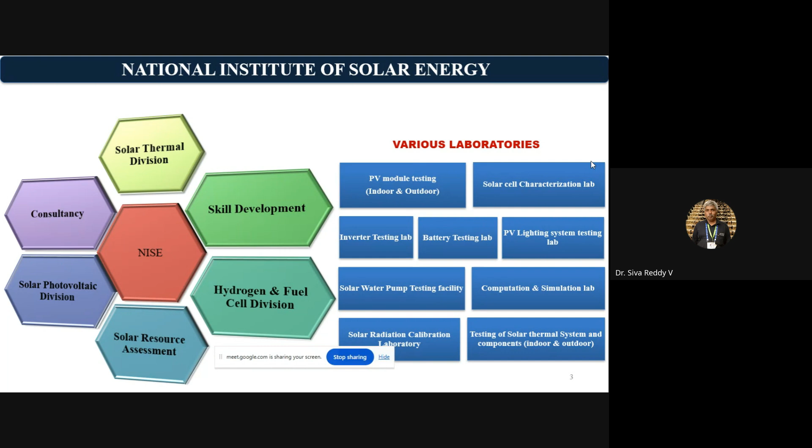Coming to today's topic, I think the last 4 days discussed hydrogen. Then why are we moving to hydrogen? Hydrogen and green hydrogen. The target is to move to green hydrogen, not just hydrogen. We know we are the third largest emitter of CO2. The major contribution is electricity, whatever electrical energy we consume in day-to-day life, and next is the industry sector. The estimated CO2 as of 2020 is 2.6 gigatons per annum. Already we have a net zero target and all.

So why do we want to move to hydrogen? Our pollution. One is electrical, second is industry. In the electrical sector, the total installed capacity is 441 gigawatts. In that, renewable energy reached 43%, but total demand utilization has not crossed 20%. We all know renewable energy is intermittent. We can't predict it; it is not continuous. So even though renewable installation capacity reached 43%, we still depend on the fossil fuel sector. 243 gigawatts is supporting the entire grid stability.

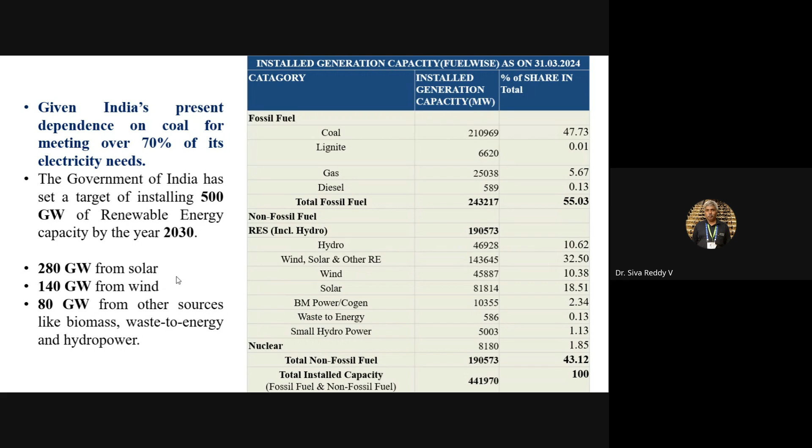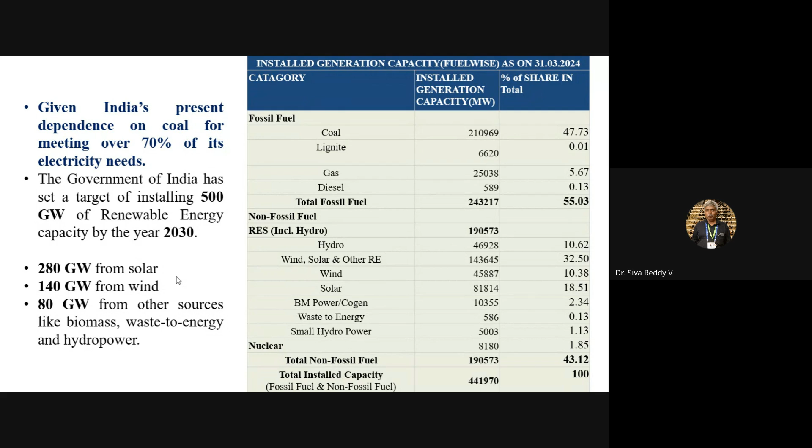Whatever the electrical energy we are generating by the renewable energy, intermittent nature renewable energy, we can store, we can produce hydrogen. Then hydrogen can be stored wherever seasonal utilization or grid stability is required, there we can utilize. So hydrogen is one of the solutions for storing energy. This is one of the targets for the electrical energy.

Next, industrial sector. Everywhere in the industrial sector, fossil fuels we are using. But some of the targeted sectors, especially the fertilizer sector, urea fertilizer manufacturing, they're almost importing 5 million metric tons of ammonia. For urea, 10 million metric tons we are importing, and 3 million metric tons. Total, our annual import value is reaching 6 billion.

If we are capable to produce green hydrogen, we can reduce the CO2 emissions. Our net zero target we want to reach by 2070. In these two sectors, we have to reduce the utilization of fossil fuels. So the best utilization is hydrogen in the fertilizer sector. Next, oil refineries and steel processing industry. Majorly, we are using hydrogen there.

So in these two sectors, in one sector we are introducing hydrogen for storing electrical energy. In the second sector, they are already using hydrogen for production of ammonia for different purposes. There we are capable to substitute the gray hydrogen or blue hydrogen with green hydrogen. We can reduce the CO2 emissions. So demand is fixed, enough demand.

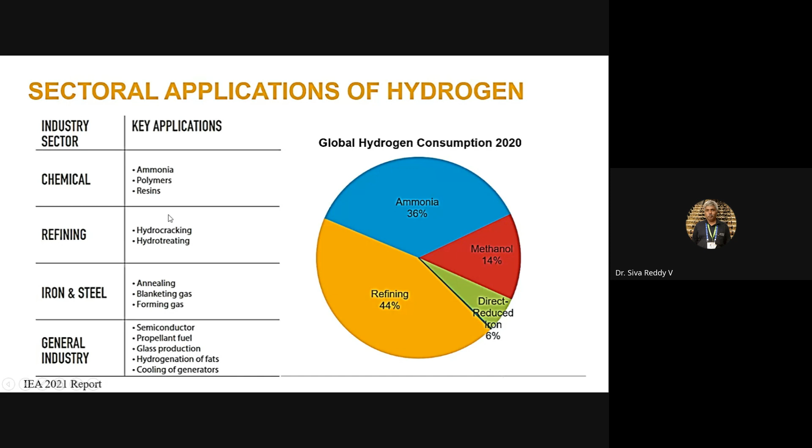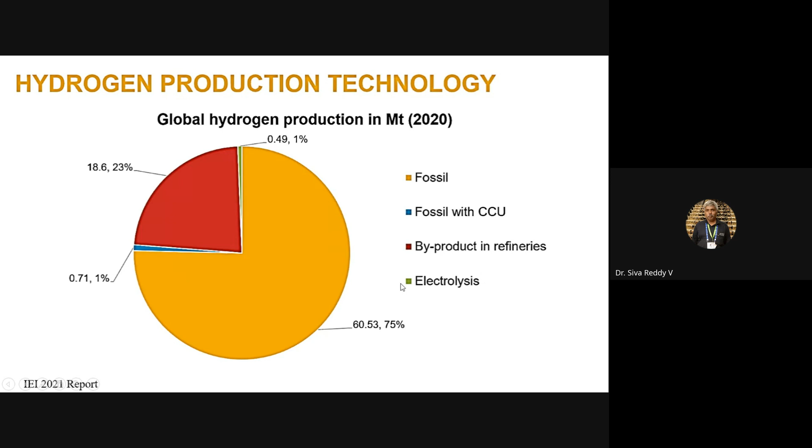Then coming to the renewable energy inputs, only two sectors of renewable energy are fulfilling our needs. One is wind energy. Earlier, at 100-meter height, I think the target was around 400 gigawatt only. Now, the potential estimated by the National Institute of Wind Energy, with height increased to 120 meters, what is the maximum potential capacity? And with height increased to 150 meters, what is the potential capacity? So wind also has high support for electrical energy generation.

Second one, solar. If 3 to 5% of the solar energy you are capable to utilize, it will be sufficient to fulfill our entire needs. And with PV panel technology upgradation, when we started in renewable energy in 2007, I think at that time the PV module cell structure could convert visible radiation only. Now that range also increased up to 1000. That's why cell efficiency is increased.

So absorption rate is increased, automatically output also increased. Earlier, the laboratory efficiency was only 15%. Now it has crossed 23 to 24%. Field efficiency also, majorly we will get 18 to 20%. So these are the renewable energy technologies available, two technologies to substitute the electrical and industrial needs.

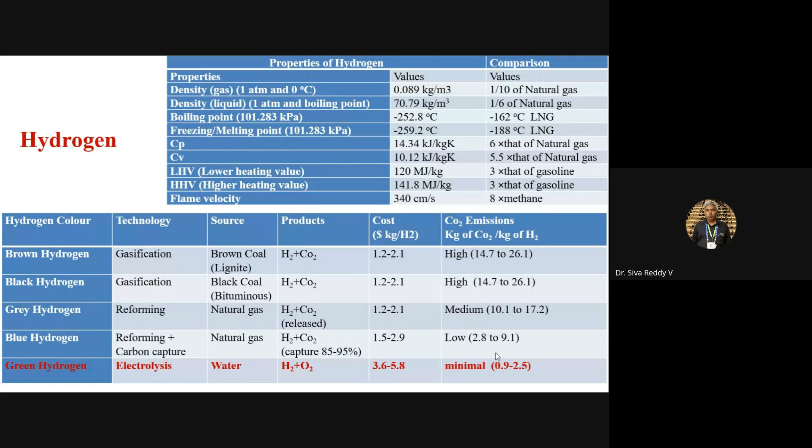For manufacturing the product, we are not using renewable energy. So that's why with green hydrogen also some CO2 emissions will be there. It can reduce based on the different technology. Now technology upgradation is there, the value is reduced, but the CO2 emissions are not zero with green hydrogen either. These are the technical aspects, mostly discussed for our economic analysis purpose. Just some of the points I am touching.

One is cell pressure. First, the alkaline electrolyzer is the most matured electrolyzer system, but the main problem is it is not suitable for renewable energy. Why? Because renewable energy is intermittent in nature. The response time of the alkaline electrolyzer will take time, 1 hour, 2 hours, based upon the heater arrangement and pressure enhancement arrangements.

It will change. But for continuous operation, if you are continuously getting grid power, then the cheapest and well-matured technology is the alkaline electrolyzer, which they are using for industrial applications. The gas pressure is lower, only 1 to 10 bar, the maturity is full, and the lifetime of the electrolyzer stacks is also high compared to others.

Second one, anion exchange membrane. It is not fully matured, R&D stage only. Next, proton exchange membrane. This is also a somewhat mature technology. The main advantage is it is well suited for the intermittent nature. Means the response time is very, very low compared to the alkaline electrolyzer. And hydrogen purity: if response time is very low, the purity is also high.

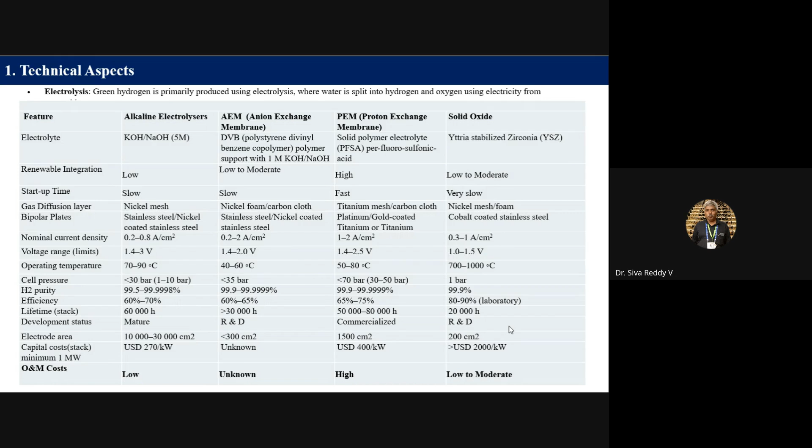So two technologies, especially for our renewables, alkaline electrolyzer and proton exchange membrane, are only adopted at present. Solid oxide is generally considered for industrial waste heat. So these are the energy input requirements for each technology. The alkaline electrolyzer uses roughly 4.5 to 5.5 kilowatt hours of electrical energy for 1 meter cube of hydrogen production. Operating conditions I already mentioned.

Next one, storage technologies. At present, compressed hydrogen gas is one of the mature technologies. In our institute, I will show the photographs, there is also a filling station. We are generating the hydrogen, compressing up to 700 bar and storing at 700 bar. And filling stations are there. The discharge pressure is 150 to 200 bar. We are discharging the hydrogen.

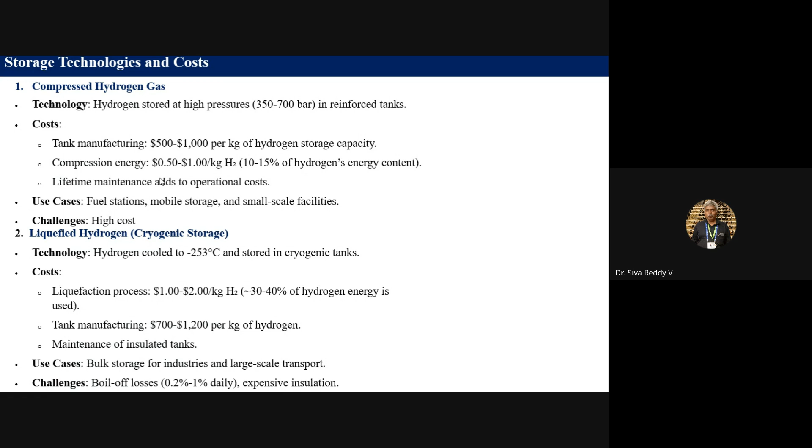The compression energy cost, the majority of the costs I mentioned in dollars. Why? Because they are still not converted to Indian rupees. Why? Because mass production rates are not coming into the picture. That's why I kept it in dollars only. The compression energy is $0.5 to $1 per kg of hydrogen.

Next, the second technology, liquid hydrogen. Mainly cryogenic storage. This is a highly challenging one. One is reaching minus 250 degrees storage temperature. That is the first challenge. The second challenge is to maintain the tank temperature. So proper insulation is required. Otherwise, it will convert to gas again. Gas means it will change the volume again. It will create big issues. So manufacturing of the tank and the insulation system is the main problem.

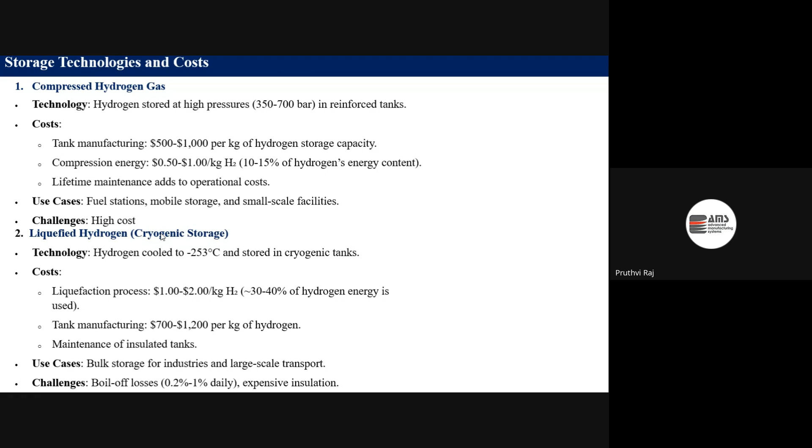And one more challenge, boil-off losses. Because next, hydrogen we are storing, for what purpose are we storing? Next we will generate the electrical energy. Then once we want to generate electrical energy by using any method, at least 70 to 80 degrees of temperature is required. Again, that boil-off loss also comes into the picture for liquid hydrogen storage.

Next, metal hydrides. This is one of the R&D subjects indirectly, because lower capacity we want to store. Different metal hydrides are there, but I think the Department of Energy, US government, kept the benchmark. Any metal hydride or battery technology per meter cube or per kg of the volume of the metal should be capable of storing at least 2.5 units of energy. That is one of the benchmark targets.

So different metal hydrides are discussed. The main issue is heavy weight, and charging and discharging also is not at a faster rate. Releasing will take time, but for releasing the hydrogen you also have to spend some energy, meaning some heating is required. And metal hydrides are not fully matured for industrial application.

Whatever the application, in my mind it is only electrical energy generation. The second one is industrial hydrogen substitution. For these two purposes, metal hydrides are not a fully supporting technology, but at lower capacities where decentralized storage is required, metal hydrides are one of the promising storage methodologies. The cost is also $15 to $20 per kg of storage.

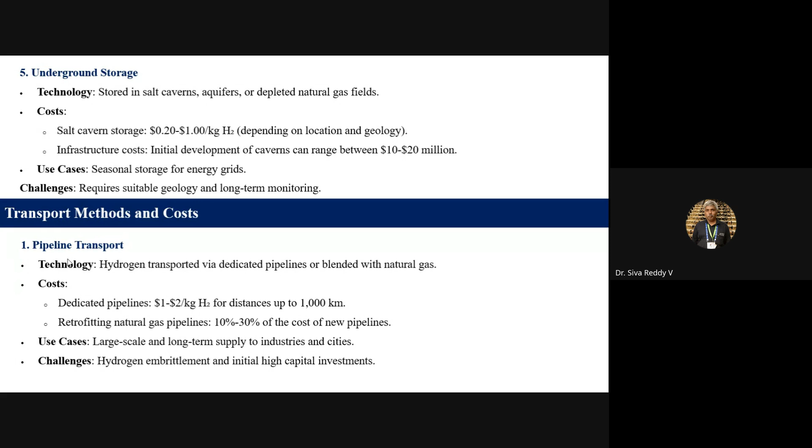Retrofitting of the natural gas pipelines will take 10 to 30% of the cost of a new pipeline, because hydrogen density is very, very low compared to natural gas. For large scale, long term supply to industries and cities, it is the best option. Compressed gas, I already mentioned, filling stations we have. At filling stations, generally they are compressing the hydrogen, storing it in tanks and discharging it. This is one of the regular storage systems.

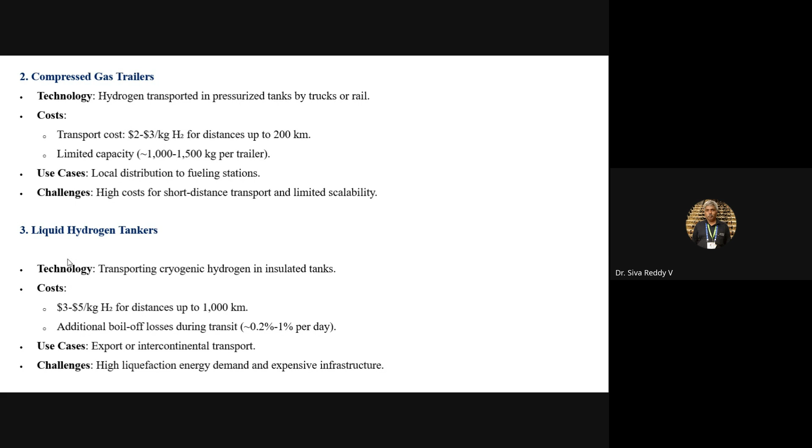Liquid hydrogen tankers, but I already mentioned liquid hydrogen. The main problem is that boil-off losses are high, but it is one of the best methods. But this is not a cost effective method. High cost, $3 to $5 per kg. But for exports, it is good.

Next, like ammonia transportation. At present, the best suitable one is hydrogen blending in the natural gas pipeline. At present, only that is running. So now, whatever pilot projects the Indian government is giving, I will show the Indian government policies also, they are concentrated on areas where the system is already available. So we can reduce the investment cost for the transportation system.

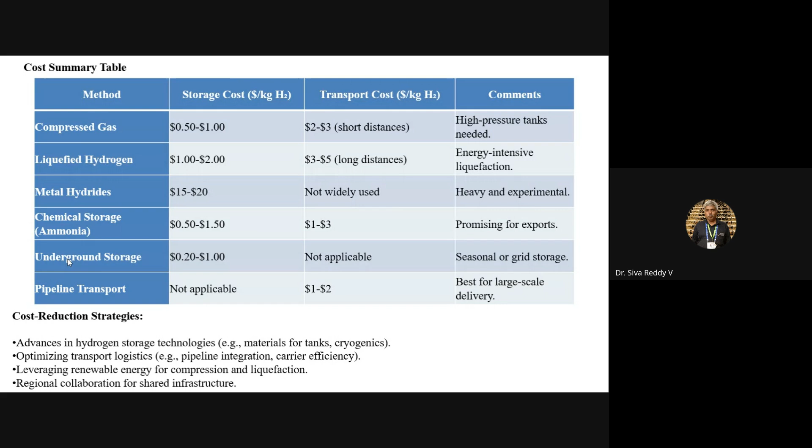First, cost reduction strategies, because the R&D part is coming into the picture. Main storage technologies, material tanks, type 3 and type 4 material tanks, the cost we have to reduce. Next, optimize the transportation logistics, pipeline integration, leverage renewable energy for compression and liquefaction, and regional collaboration for sharing of the infrastructure. That is the main important one. Only then are you capable of utilizing already existing systems. We can reduce the entire total production cost of the hydrogen.

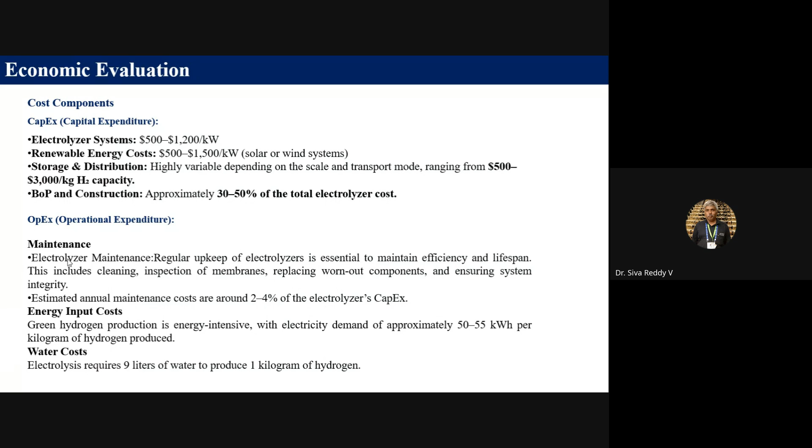Next, water cost. Electrolyzers require high purity water. Producing 1 kilogram of hydrogen requires approximately 9 to 10 liters of water. So the contributions to the overall hydrogen cost are the energy input, maintenance cost and water cost.

Current cost for green hydrogen: why? Because in-house electrolyzer manufacturing has only now been initiated, so stacks are imported, the materials are also costly, and the imported quantity is low, the quantum has not increased. In this condition, at present the green hydrogen production cost is estimated at $3 to $8 per kilogram.

But one of the best achievements: in 2007, the unit cost of electrical energy from PV panels was 14 to 16 rupees. At present, without any subsidies, Adani and different companies, I am not naming only Adani because there are so many, including transport and interstate transportation, the unit cost at present is 2 rupees 49 paise. Wind energy is also like that, 2 rupees 1 paise. If they are producing and supplying inside the state, the cost is only 1.9, less than 2 rupees. So the renewable energy cost has drastically reduced from 2007 to 2024.

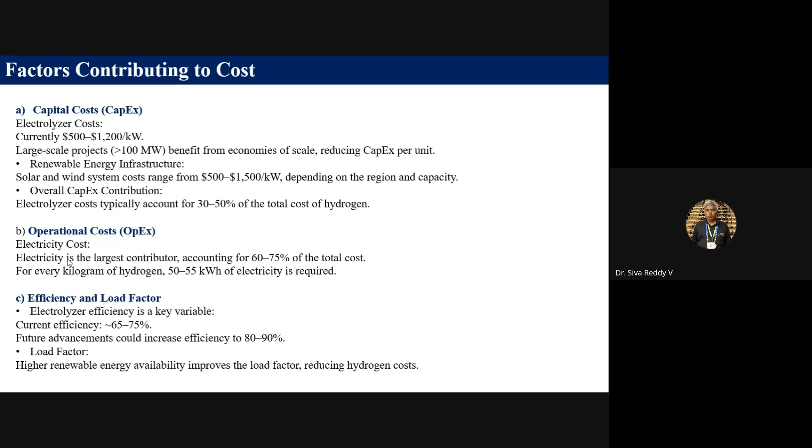So these 3 points the Indian government concentrated on: one is efficiency enhancement of the system, second is reduction of the production cost of the electrolyzer, and third is integration of renewable energy and low cost storage integration. These three are the major factors contributing to the reduction of hydrogen cost. So based on these three parameters, the Indian government launched the National Green Hydrogen Mission.

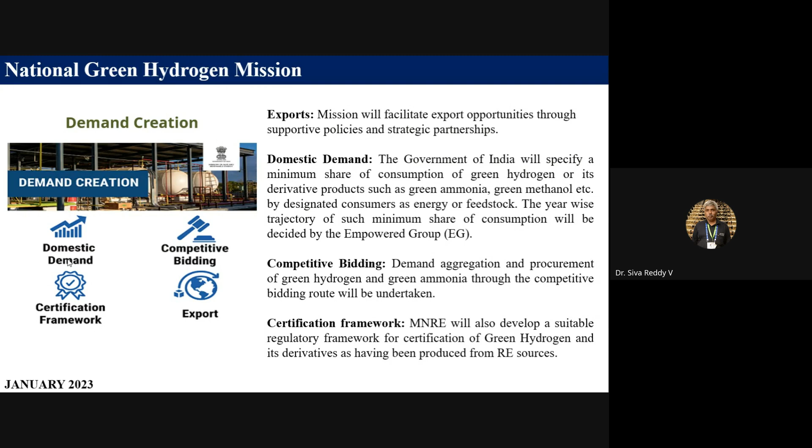These are the four targets: exports, domestic demand creation, because these are not demonstrated projects. You can see our website also, the MNRE website. These are not demonstrated but commercially viable projects we want to initiate. And we started a certification framework - NISE is the only body, the certification framework body for this green hydrogen mission.

So one of the policies is strategic interventions for the green hydrogen transition. This is the first strategy. In that, two methods we are concentrating on: supporting domestic manufacturing of the electrolyzers - this is our first strategic incentive. Second, incentives we are offering for production of green hydrogen.

For the production of green hydrogen, Tamil Nadu government came forward, UP government, Maharashtra government and AP government - a total of 7 to 8 governments came forward. We will produce green hydrogen especially for utilization in the fertilizer industry. Wherever states have fertilizer manufacturing capacities, there we will substitute ammonia imports. We can reduce ammonia imports by production of green hydrogen. So the two incentive schemes launched are for domestic manufacturing of electrolyzers and production of green hydrogen.

Pilot projects I already mentioned are properly concentrated where the storage and transportation facility, the pipeline - natural gas pipeline facility already available - their retrofitting is 10 to 30% of cost. With retrofit we can transport the hydrogen. And storage, the cave storage facility, we can easily acquire. And the renewable energy production capacity also.

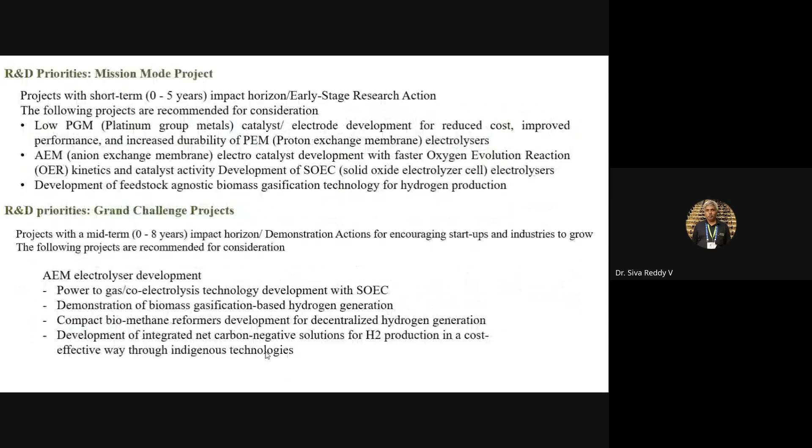Any investor for a social service will not invest, so their expected internal rate of return is at least 10%. Because simply keeping money in fixed deposits, we get 6 to 8%. More than that they must get, then only will they come into this business, at least 10% rate of returns.

The overall lifetime 10% return, these are the estimated figures.

We are expecting, like solar PV panels, that electrolyzer cost also will reduce. We are replacing the materials we currently use. And for the separator also, recently in Bangalore one industry started using water as a separator. The efficiency is low, but the cost of the electrolyzer is reducing automatically. That's one of the methods they are using.

I'm not concentrating on the technology point of view, technology has already been discussed. The economics is where it will fit, the total economics part: efficiency, mass production, renewable energy input, then only paybacks are coming.

Otherwise, at present the Indian government is giving some incentives. In the strategic plan of action, initially up to 2029-30, we are giving some incentives to balance that cost. For whatever cost is coming beyond $3, that cost is substituted by the Indian government to encourage the industry. But in the meanwhile, the cost itself has to reduce, like PV manufacturing.

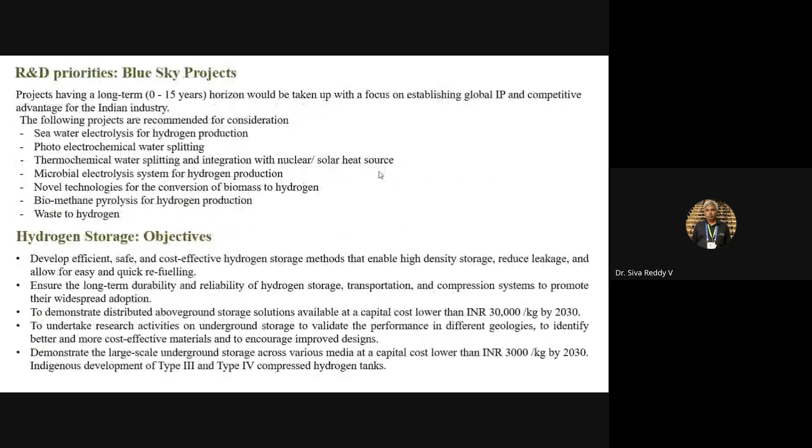I think these are the systems. So here in our institute, on our institute plant working, I will explain.

This is not a commercial plant. In India, the first plant for demonstration purposes, green hydrogen demonstration, was established in 2012. One more plant, a proton exchange membrane electrolyzer based plant, is at IOCL in Delhi. Only two plants are there, so this plant is the first plant.

Here in our institute, more than 200 acres of land is there, so we have almost 700 kilowatt capacity renewable energy installations available. So full green energy we are supplying, but the plant running time is not 24/7.

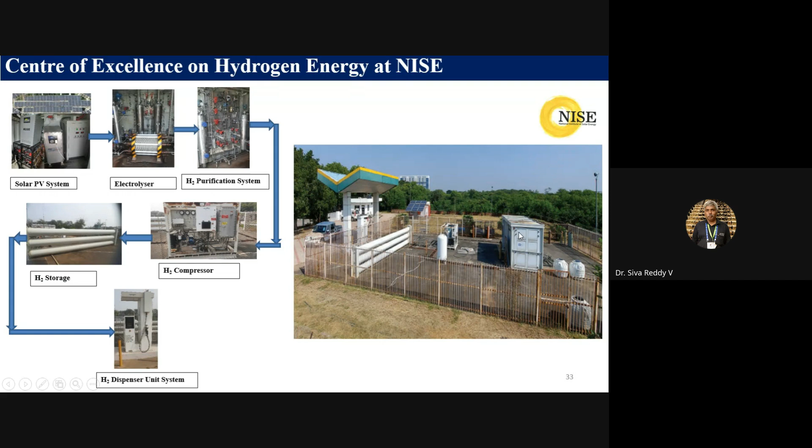This is the electrolyzer, this is the purification system, purification and control unit. This is the compressor unit, this is the storage unit, this is the filling station. Some of you may visit also and see. Now we increased from 5 meter cube to 15 meter cube.

I will stop my presentation. We can start discussion, it is good.

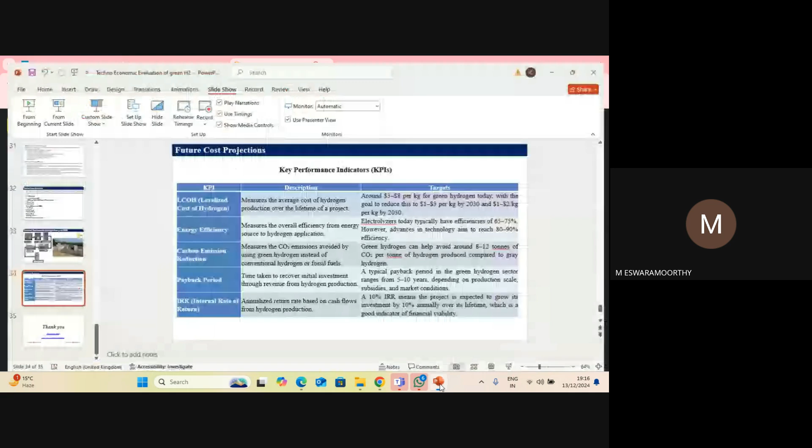Dr. Trijo, so you are asking some questions. Yeah, please, hello sir. Can you mention the startup opportunities available with green hydrogen? Could you introduce yourself, where are you from? Switch on your camera, that will be visible to other participants also. I'm sorry sir, my camera is not working. No issues, no issues, what do you want sir? I'm from Sri Buddha College of Engineering, Kerala.

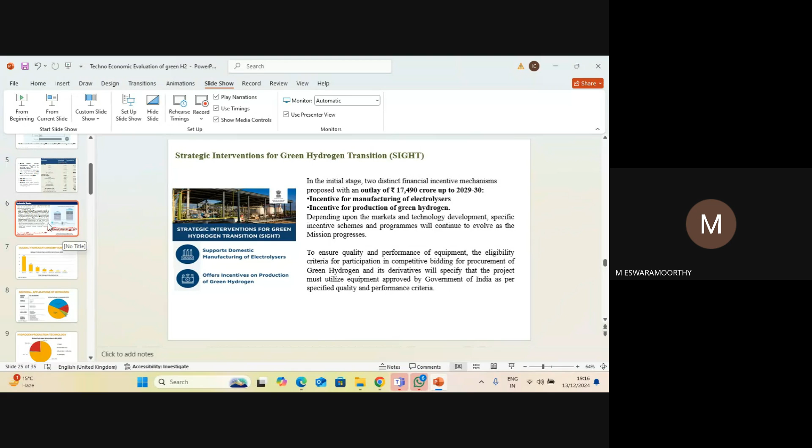Sir, can you mention the startup opportunities available with green hydrogen? Sir, your voice is not clear. He is asking the startup opportunities in the green hydrogen domain. Yes sir, that...

Electrolyzer manufacturing, or rest of the components also. Rest of the plant also. The integration of the system, that is also one of the important components. Exactly, especially for mechanical background persons. At least I think new proposals, they are inviting proposals. Rest of the plant, whatever components are there, their manufacturing also, especially compressors, 700 bar pressure we want to compress the hydrogen for the filling station purpose.

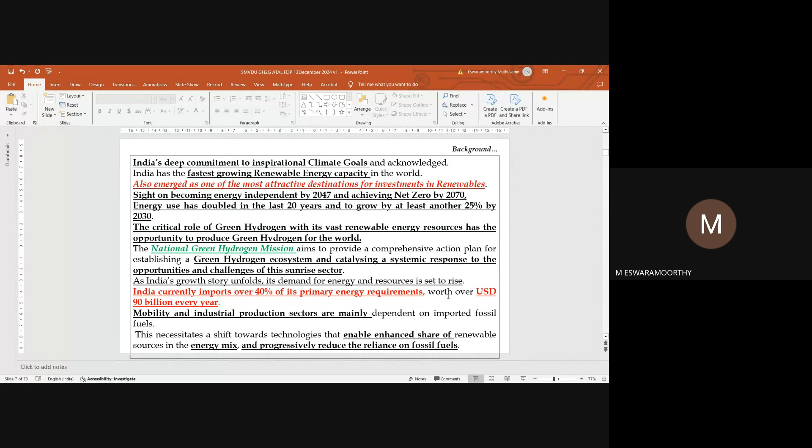So there is a necessary shift towards technologies which enable an enhanced share of renewable sources in the energy mix, mixing with fossil fuel to reduce its consumption rate and reliance on fossil fuel, with the aim of reducing emissions as well. Now in these slides, I will first start with solar photovoltaics.

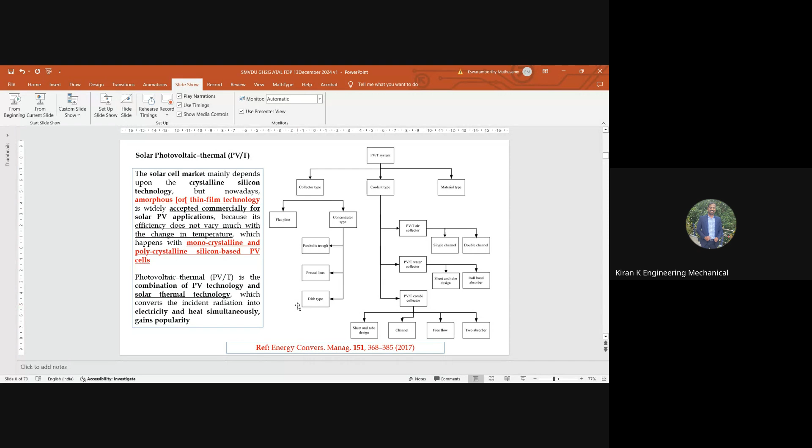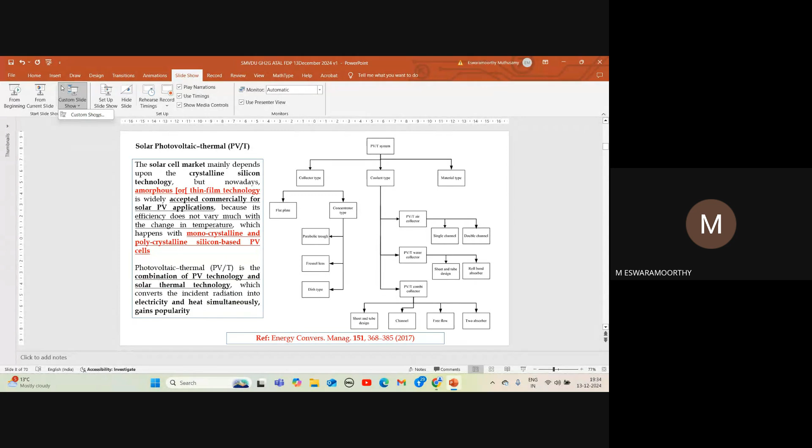Sir, can you please go to slideshow, because the screen is very small; it is not in presentation mode. I understand, but when I go to presentation mode, it is not visible. There is some technical glitch. Top tools: home, insert, draw, design, transition, then slideshow, from current slide. Is it visible now? No, sir. When you're sharing, share the entire screen; you have shared only the window. Okay, thanks for your input. I'm sharing the entire screen again. Slideshow from current slide. Is it okay?

Is it visible, sir? Yes, sir. Visible. Okay, sir. Fine. Thank you, dear participants, for your technical input on this.

Yeah, thank you. So now I'd like to carry on with the presentation. I said there are various different kinds of electrolysis available for hydrogen generation, but the input is supposed to be green electricity, taken from the solar thermal route or solar photovoltaic route. These routes have low efficiency, but if you enhance the efficiency using thermoelectrics and PCM material, it will help increase the overall energy conversion efficiency. It helps reduce the total cost of green hydrogen production.

So now I'd like to give some state-of-the-art technologies available in the literature, where in the solar photovoltaic thermal PVT system, the thing is to increase its efficiency. Many researchers work in solar thermal, you might understand it.

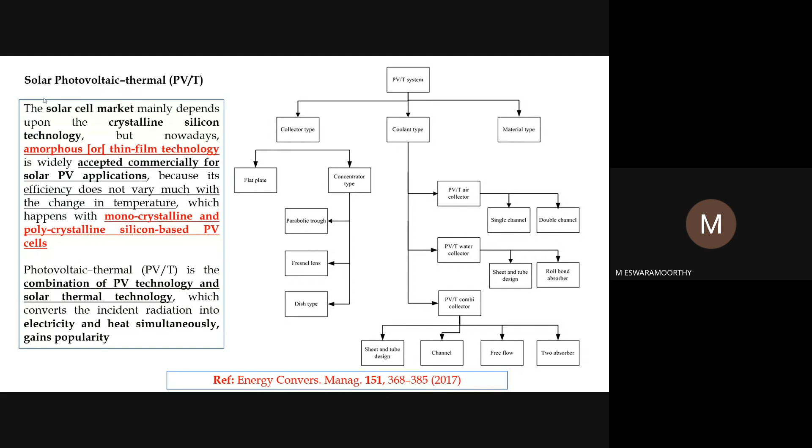So this collector, in thin film technology or amorphous technologies in the solar cell market, uses coolant materials, an air collector or water collector, or a combination of nanofluid, which helps enhance its thermal efficiency. That's an overview, and they mentioned the system generates both electricity and heat simultaneously. That is an additional advantage of the system.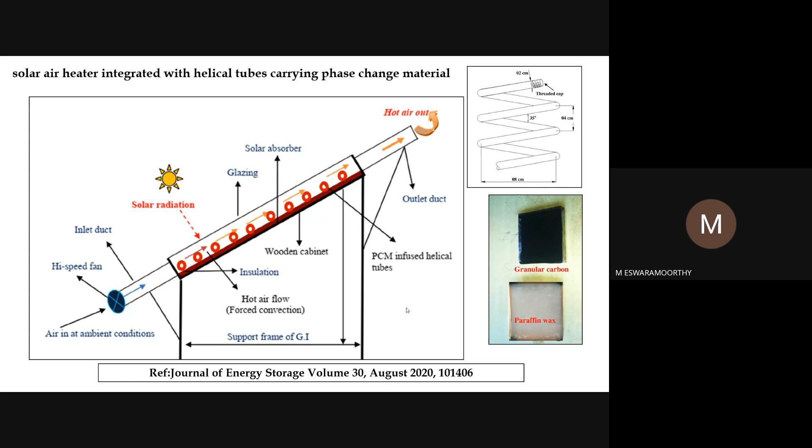So this solar still, which is using phase change material and nanoparticles, I'd like to skip over here. It's not relevant to us. Whereas this solar air heater integrated with helical tubes carrying phase change material, the only thing is heat storage, which is using paraffin wax, which helps to enhance its performance. So they are used in different applications.

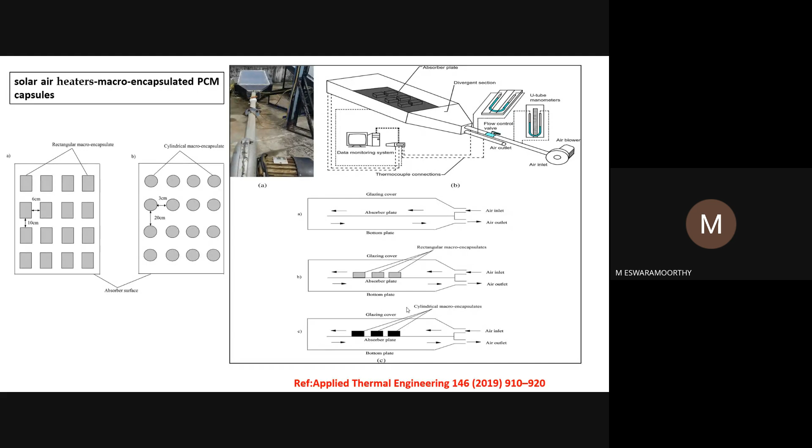So another, it's an air heater. Let me skip it over here. That air heater with macro-encapsulated PCM capsules. I think this work is a very old one. It's done in NIT Calicut, Professor Jairaj and team. Then the pin solar air heater using latent thermal energy storage.

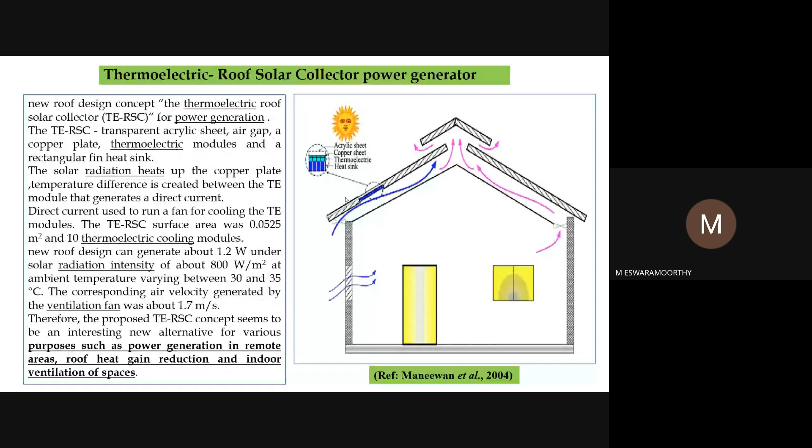The work here is used to generate additional electricity to run the fan. So in this research work, people are working on the thermoelectric generator in power generation mode to run small applications, like running your fan or charging your battery. These kinds of things are happening in this study.

Based upon the PV cell material, the optimum operating temperature is going to vary. We have to maintain it based upon that operating temperature. PCMs have different melting temperatures, and that particular melting temperature PCM is what we are supposed to use here. So it will help to maintain the PV cell at constant temperature and at the maximum power generation point.

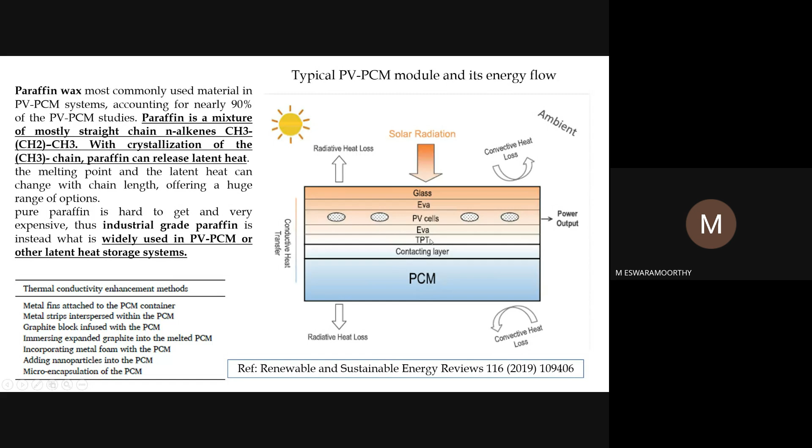So this is the overall picture of how the structure of this component is, where the glass is connected with some gap and the PV cells. Then the Tedlar coating, TPT, the contact layer, where the PCM is going to be fixed. Then the photovoltaic panel is integrated with the PCM material.

Even in the efficiency of any thermal system, if it improves 0.1%, it's a great achievement. It means without any extra heat input, we are gaining power output. So 0.1% is an improvement.

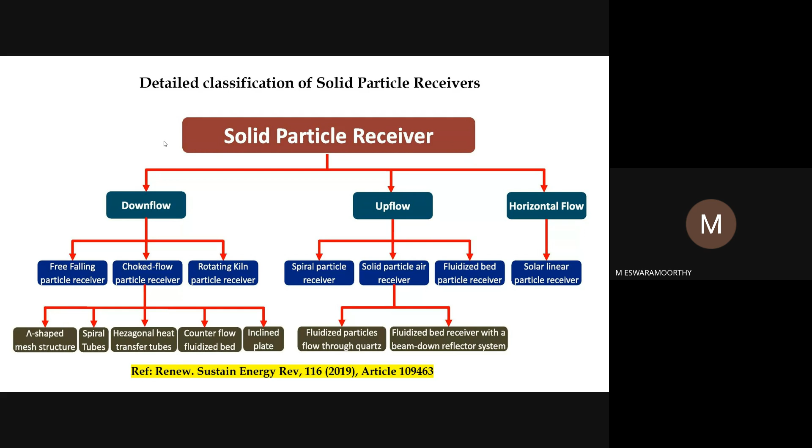Solid particle receivers come in different mechanical arrangements. It was reported very recently: downflow, upflow, horizontal flow, fluidized particle flow through quartz, fluidized bed receivers, inclined plate counterflow, and triangular-shaped mesh structures, different mechanical geometries. Then supercritical carbon dioxide SCO2 Brayton cycles in power generation technologies.

Supercritical CO2 is used as a thermal transport fluid. Again, no need to discuss; it is a thermodynamic process, the Brayton cycle. So let me go to the challenges: material problems due to high temperature and high pressure, limited efficiency due to the metallic materials and the structure, small specific work compared to Organic Rankine cycles, and large system volume.

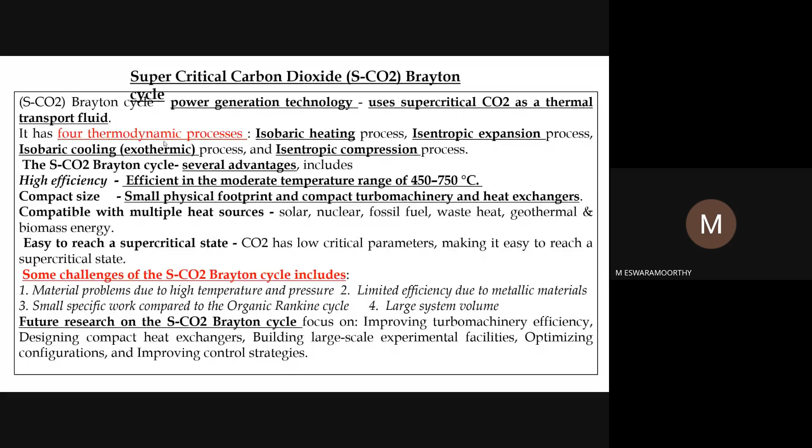Future research on this topic is focused on improving turbomachinery efficiencies, designing compact heat exchangers, building large-scale experimental facilities, optimizing configurations and improving control strategies. These are some areas in which the supercritical CO2 Brayton cycle is going to be improved.

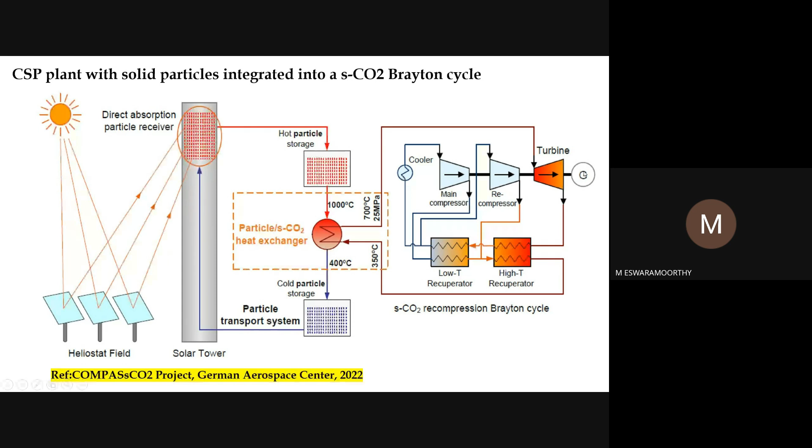It's better for existing solar systems: a CSP plant with a closed-loop SCO2 Brayton power cycle is also reported here. This technology uses the SCO2 Brayton cycle with a heat storage unit, turbine, recompressor, main compressor, heat exchangers and high-temperature and low-temperature recuperators, used to recycle and exchange heat. So it also gives better efficiencies.

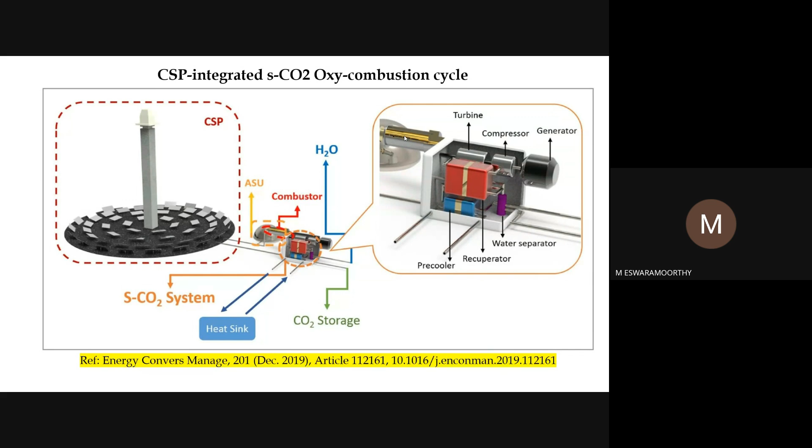Then the CSP-integrated SCO2 oxy-combustion cycle, reported in 2019, where the concentrated solar power plant is combined with a conversion unit: the turbine, compressor and generator are compact in nature, with CO2 storage and the supercritical carbon dioxide system, where the heat sink can be stored.

Another is the future technical target for next-generation receiver components. The ultimate aim of whatever we are discussing on supercritical, high-temperature and low-temperature systems is that renewable energy can be used for electrolysis. That's what we are focusing on in this area. The operation and maintenance targets are based on 2020 costs, all mentioned in dollars.

An Indian report we could not find, but these are the future technical targets: thermal storage efficiency of 99%, exergy efficiency of 95%, cost coming down to $15 per kilowatt hour, power cycle inlet temperature greater than 720, and net power block cycle efficiency greater than 50%, which is very good. A simple or integrated Rankine cycle also reaches almost 50%, but this system is a completely carbon-free energy system.

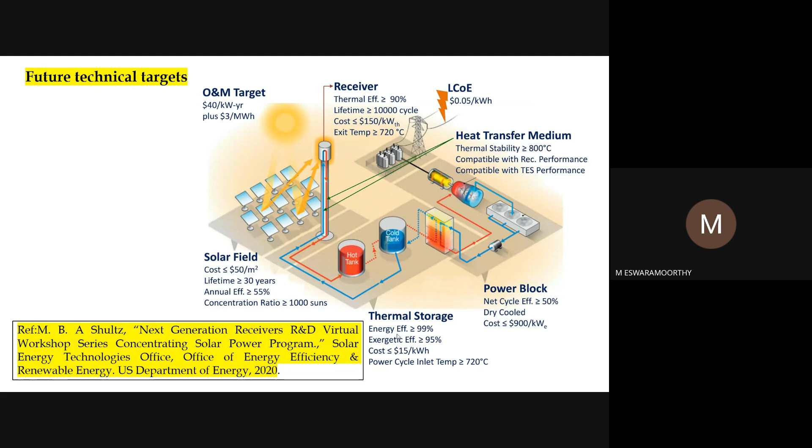That's what we are targeting on this. The heat transfer medium, where the thermal stability is greater than 800 degrees centigrade, compatible with receiver performance, compatible with thermal energy storage performance, where the levelized cost of electricity target is $0.05 per kilowatt hour. So it is a target.

Hydrogen can be processed using SMR, the steam methane reforming process, where concentrated solar power is taken as the heat source. A concentrated solar power plant supplies the heat needed for steam methane reforming. Solar reforming can have a competitive cost compared to traditional fossil fuel systems. It is a more sustainable approach than conventional steam reforming. Green hydrogen produced by solar reforming of renewable feedstock is 100% green.

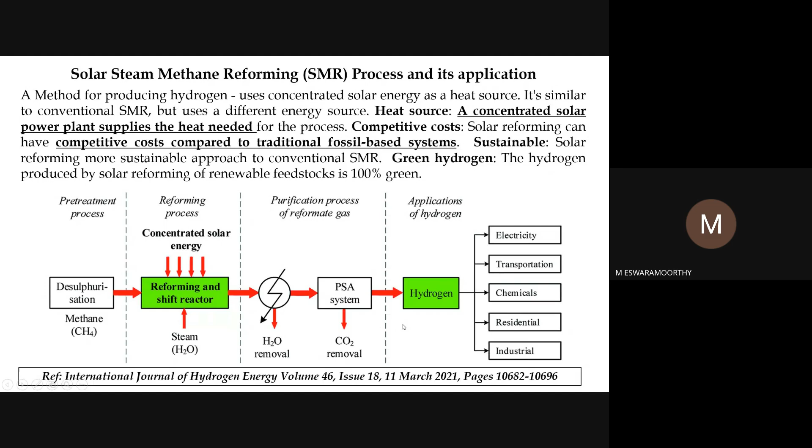Methane, the raw material CH4, goes through a pre-treatment process, then a reforming process using concentrated solar energy in the reactor, where we add steam in the form of H2O. Then purification of the reformed gas happens, with removal of H2O and the remaining CO2. Then we take the hydrogen. Hydrogen can be used in various applications: electricity generation, transportation, chemical, residential and industrial. In this steam reforming, the feedstock is 100% renewable.

The main characteristics of past, present and future generations of concentrated solar power plants: first generation, second generation and third generation. We are now in the third generation, with expected receiver outlet temperatures greater than 700 degrees centigrade. Initially it started with parabolic trough and linear Fresnel reflectors at 250 to 450 degrees centigrade, the second generation up to 565, and the parabolic dish concentrator, PDC, at 720. Using salt, particle or gas as the heat transport medium, they are expected to be greater than 700 degrees centigrade.

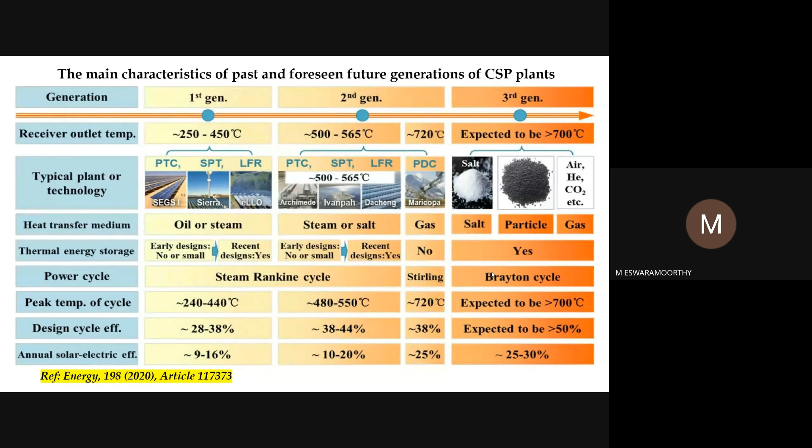In this quick review, we can easily note that the annual solar-to-electric efficiency is 25 to 30%, the design cycle efficiency is greater than 50%, and the peak temperature in the cycle is 700 degrees centigrade, where the power cycle is a Brayton cycle. If somebody wants to work on the solar power cycle, you can work on this Brayton cycle, take relevant literature, and you will get some idea where to start. It will be a good market. Funding agencies will give for simulation work as well as small experimental work or startups.

Now I'd like to give what you call it in some other technologies, which is power generation using a novel concept of hybrid solar chimney power plant. Probably the faculty teaching mechanical and renewable energy courses, this concept might already be part of your syllabus.

But this work, reported almost in 2021 on sustainability, uses some technologies where they developed a 200-meter height solar chimney. The hot air is sucked in, put into a natural draft where the turbine is placed, creating a natural draft where the turbine operates because of this system.

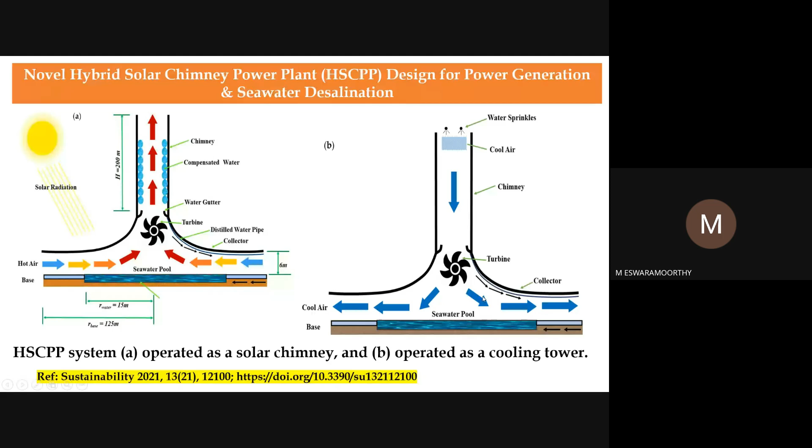When operating as a solar chimney, and also if operated as a cooling tower, the turbine also works. So we are also generating some amount of electricity in both cases. It's a simple concept, both in charging mode and in cooling mode, we are generating electricity. So it's a good concept.

Where the generation of green hydrogen is concerned, it is a simple technique. Simple diagram here - it is a power source. If we take the power source from a renewable energy based power source, then it's completely green, where we are running it with an electrolyzer.

Why are people using electricity and electrolyzer? Electrolysis is already a technology-driven, well TRL-rated, known technology. It is a more efficient system. Even in alkaline at low temperature, people are working on that. It has the highest efficiency. The thing is the catalyst used in alkaline - if you find any alternate materials, alternate catalyst or membrane, it will be a better system.

For the generation of green hydrogen, this slide shows the electrolysis component, where you supply not an alternating current, but a direct current. So we add one input, direct current electricity, and water is an input, and we get as product H2 and O2, and some amount of heat coming out of the system.

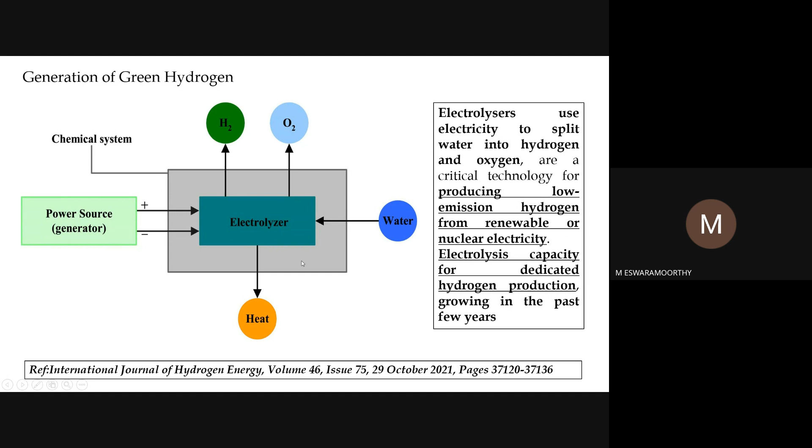So we take two inputs. It is a chemical system - there is no combustion here. Only chemical reactions which need electricity, direct current, as well as water. It generates O2 separately and H2 separately at different cathode and anode, with ionic exchange or whatever chemical reaction happening, and heat is part of the output.

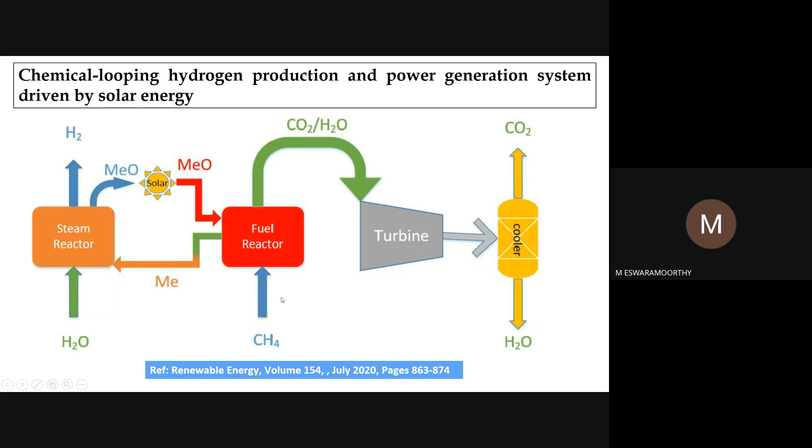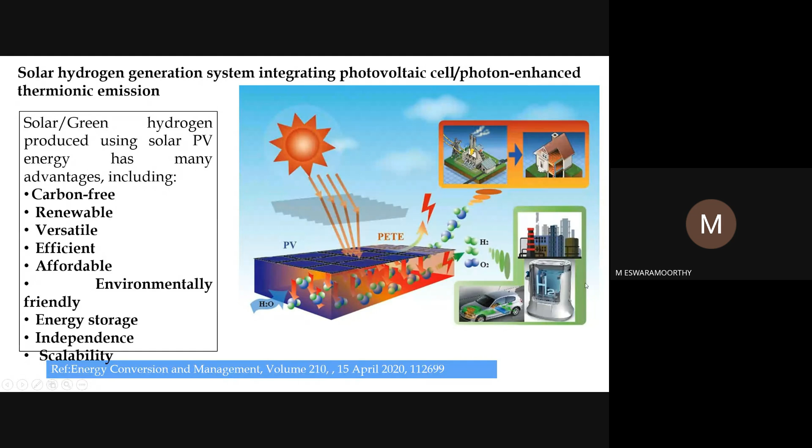The water here has an inlet, for the photon enhanced thermionic emissions, that's PETE, working on ionic exchange. This graphical presentation shows an application side, so we'll skip to the next one. This also shows hydrogen generation with a detailed isometric view of pictures.

So this entire system happening here is a multi-generation unit, based on a hybrid system with solid oxide electrolysis, solar energy, and molten carbonate fuel cell, from the Journal of Energy Storage.

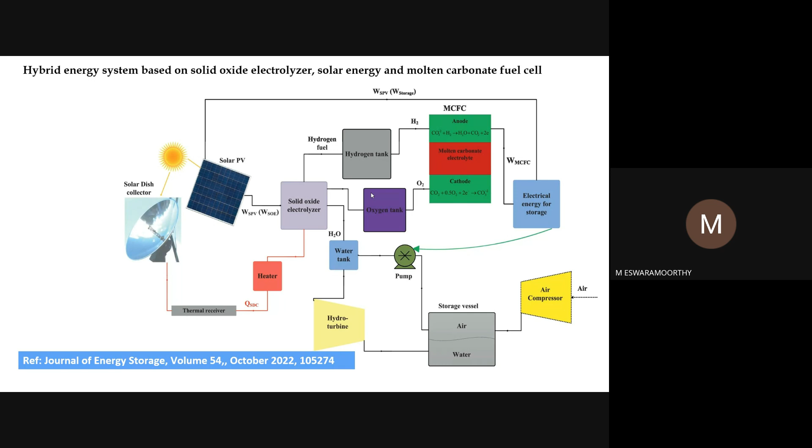Then whatever energy and hydrogen is produced is used in hydrogen storage, then again used for the fuel cell component. In this way, they're looping and integrating things for different outputs.

So again, another is the solar hydrogen generation with direct coupling of photo and thermal energy. It involves performance improvement of around 32.9%, an improved performance production, and reaction temperature more than 10 degrees lower. Recent papers used many catalysts: copper, zinc oxide, aluminum oxide.

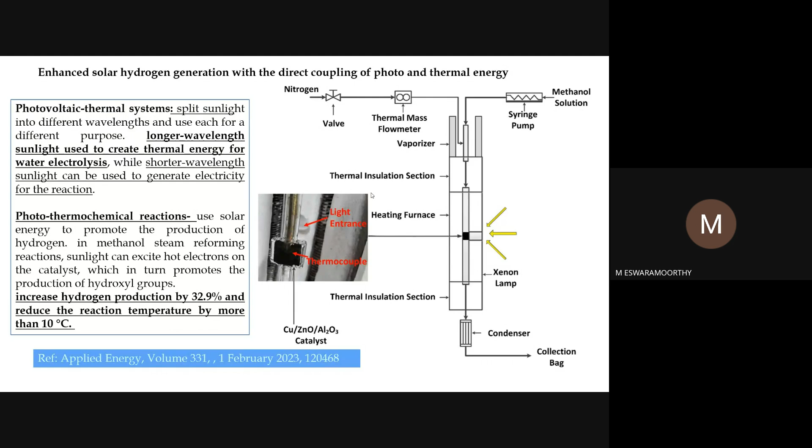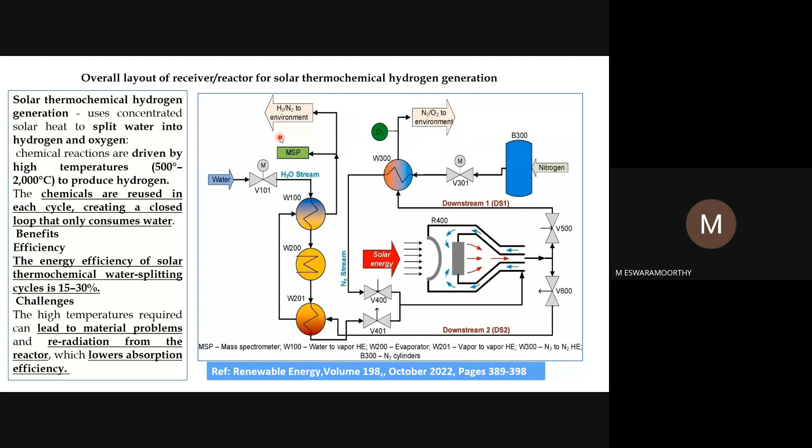We can also work on this. Then the overall layout of the receiver, reactor, and solar thermochemical hydrogen generation - this is also a very recent paper where we concentrate solar energy on the concentrator. Different fuels flow through it, around 400, in various chemical processing steam processes where hydrogen is generated. The cycle efficiency for water splitting is almost 15 to 30%, with challenges including material problems, re-radiation from the reactors, and lower absorption efficiencies.

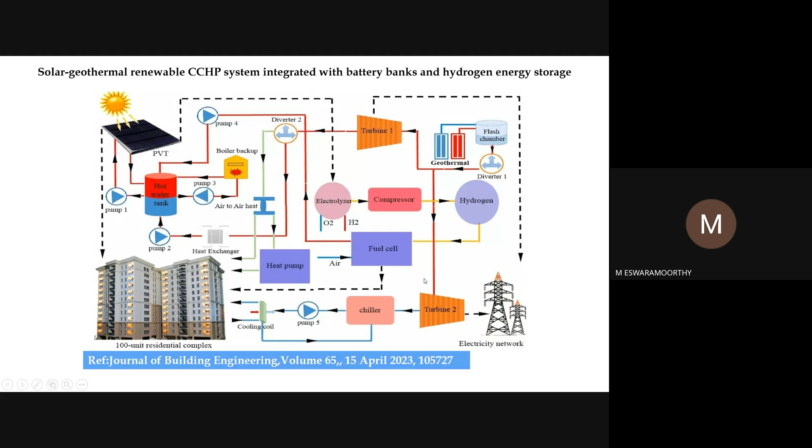Then some work connected to geothermal renewable energy sources, a renewable CCHP system integrated with battery banks and hydrogen energy storage. This works on the combined system principle using PV thermal. Again, pump back and electrolysis are used here, and hydrogen is stored. Then it's used for the fuel cell, which runs electricity, the heat pump, and the cooling coil for this unit. So this is a part of work we can invest in on this topic.

Hybrid biomass power systems also generate electricity. Different electrolysis methods are used depending on the application - PEM electrolysis or alkaline electrolysis for low temperature applications like photovoltaic or solar thermal systems. When concentrated solar PV or concentrated thermal systems are involved, solid oxide electrolysis is used for high temperature applications, keep this in mind. The hybrid biomass solar power system provides reliable power.

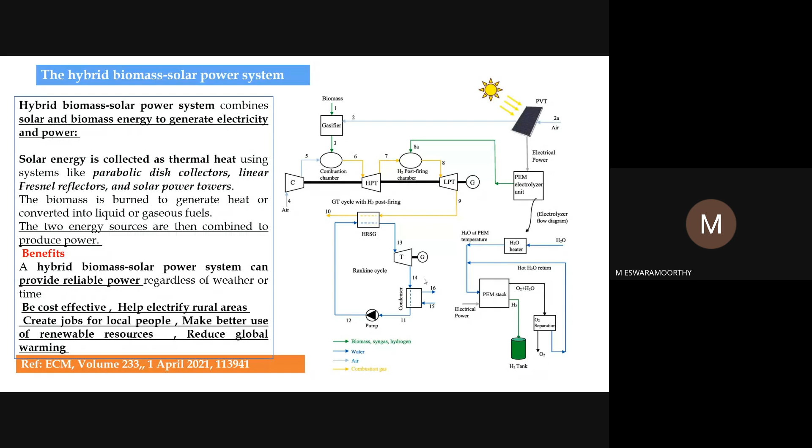Reliable power without dependence on weather and time, and also cost effective, helping electrify rural areas and create jobs. So it is a common dialect, probably easily understandable.

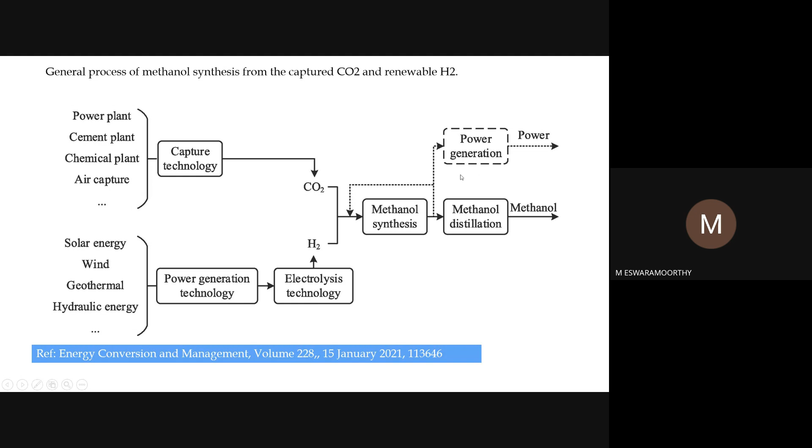Next is an integrated solar driven hydrogen generation system by pyrolysis and electrolysis, coupled with carbon capture and a Rankine cycle. Here the Rankine cycle involves a steam cycle, where the steam recovered from heat can be used for steam cycles.

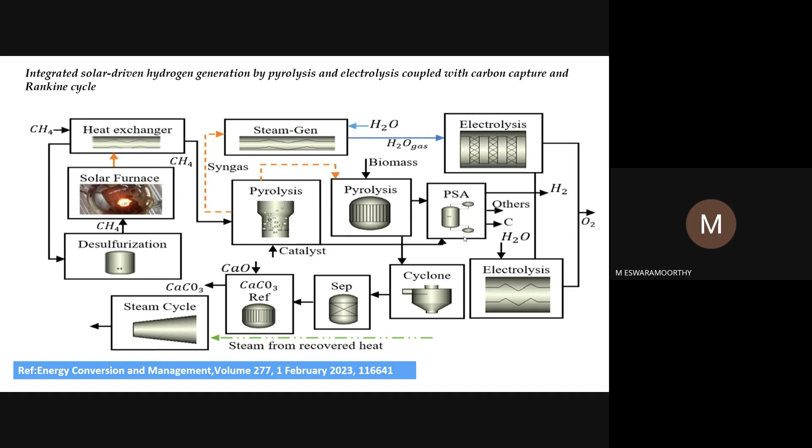The solar furnace is used in heat exchangers, with a syngas or pyrolysis method acting as a catalyst, where the hydrogen comes out. Electrolysis is used for hydrogen generation, and this method also handles heating and cooling processes.

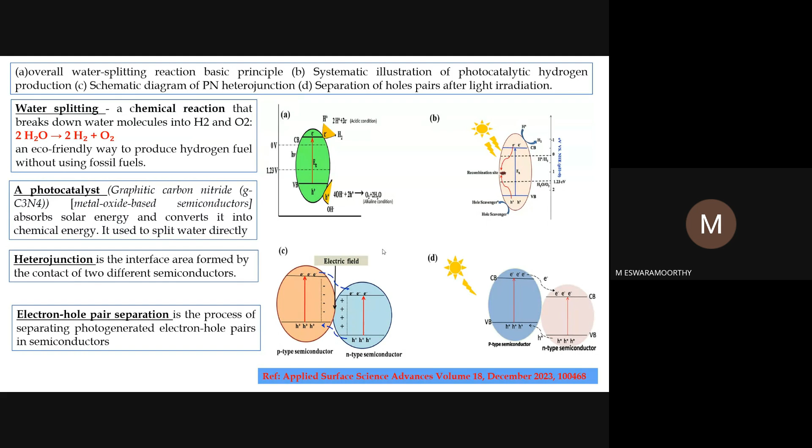Another component: overall water splitting reaction basic principle. Number one is water splitting, then photocatalytic and heterojunctions, electron-hole pair separations, where hydrogen is generated from the physics and chemical points of view.

Photocatalytic water splitting mechanism on semiconductors - this process uses light energy, water, and a catalyst to produce hydrogen and oxygen. It is promising as a sustainable and environmentally friendly way to generate hydrogen fuel.

The solar-to-hydrogen efficiency of photocatalytic water splitting is very low - research has only achieved 9.2%. This is only for research work and academic study; people are working on the materialistic and commercial aspects, but it's still not achieved commercially. The commercial leader is electrolysis, which has achieved more than 60% efficiency.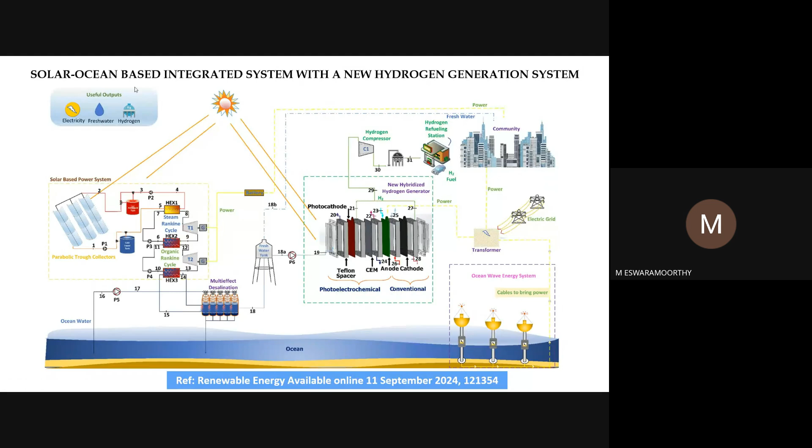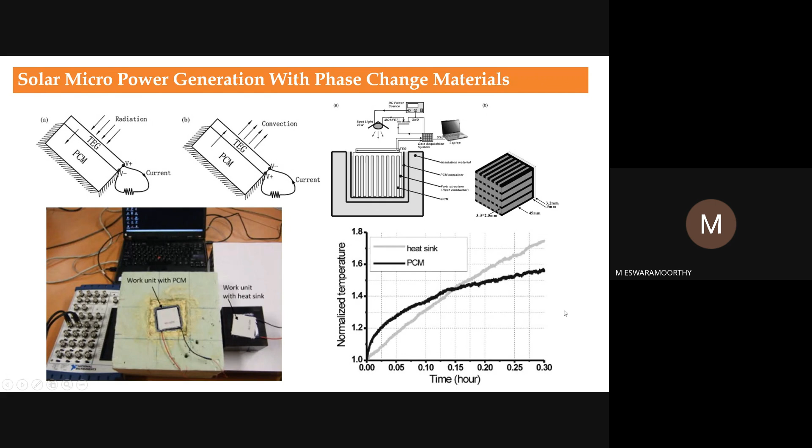They made a small lab scale model, so it generates electricity to power a small mobile charger or a small LED lamp. So that also is a basic work where they mentioned the minimum temperature which was happening with the PCM.

Even in thermoelectric models, that's a power generation model we are talking about, which works on the Seebeck effect. Another one is the Peltier effect, it is a cooling model. So we are not talking about that cooling model, but it's the reverse phenomenon of the Peltier. It is Seebeck.

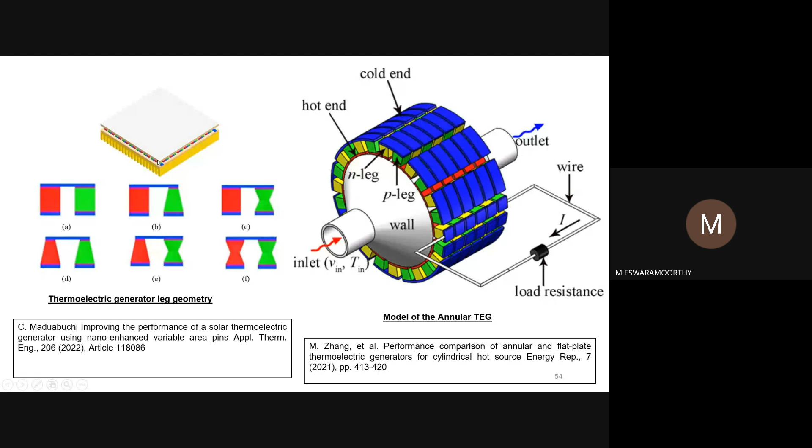But here is one of the reports recently published, where the hot flue gas is flowing in your two-wheeler exhaust. They are keeping it at the outer shell with the hot and cold sides, and the N material in a cylindrical shape. So where it is flat in shape, this section is cylindrical in shape. So I'd like to give some idea of work which is published.

There are also cooling techniques through which power is going to be generated. For this thermoelectric generator, there is no need for additional heat and other things. Whatever excess heat comes from this solar PV panel is taken into consideration for additional power.

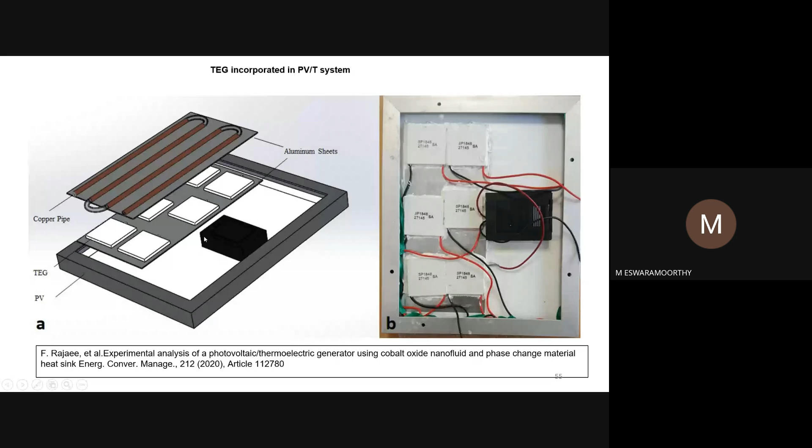On the PV panel, the thermoelectric generator is fixed. This thermoelectric generator is cooled with a copper pipe or cooling mechanism. The cooling pipe having different fluids and different orientations also helps the overall system performance of the combined PV thermal system or TEG integrated system.

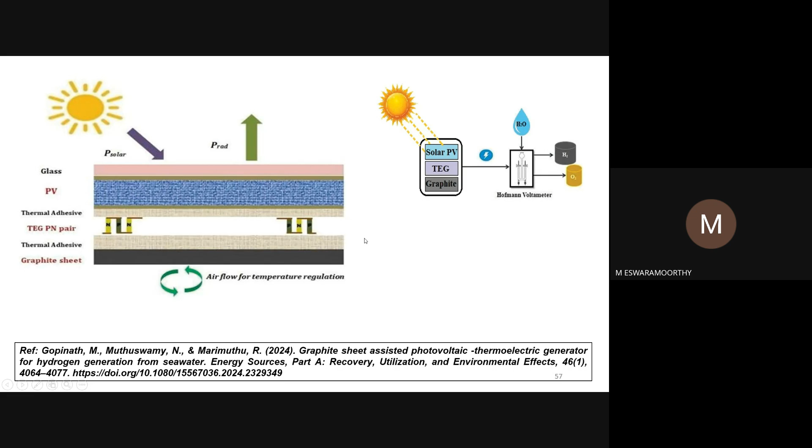Here I noticed there are many thermoelectric modules fixed over here, and on the cooling side they are fixing graphite as the cooling medium. It was also recently published in an SCI journal. That's what I'd like to share with you for your quick understanding.

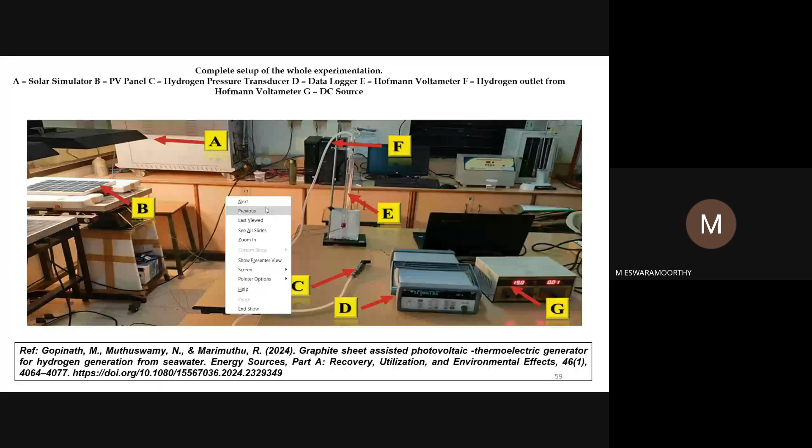Then the complete small setup that the group at VIT made is easy to fabricate, with some funding of 2 to 3 lakh. You can also have a look at these pictures, where instead of graphite you can go for any other cooling materials, low temperature materials, or store the heat in the backside of the thermoelectric. That is also getting much attention.

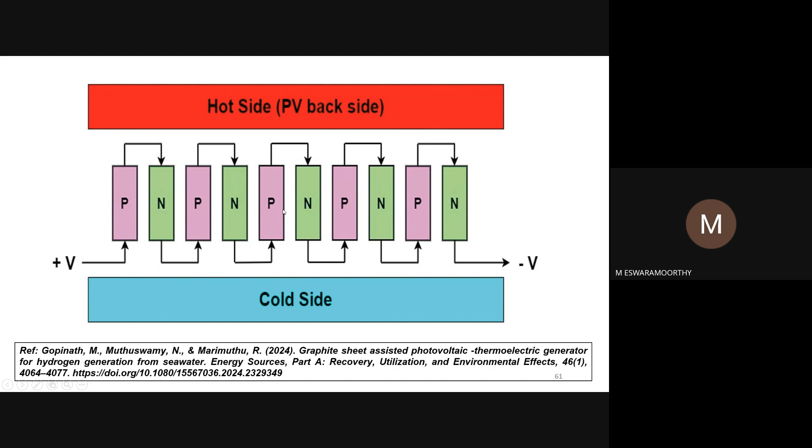In this picture, the PV cell's performance is not affected when you keep it at a very optimum temperature. But the excess temperature generated in the PV modules, using a thermoelectric generator, gives additional electricity. Both electricity can be used to run your alkaline electrolysis or PEM fuel cell.

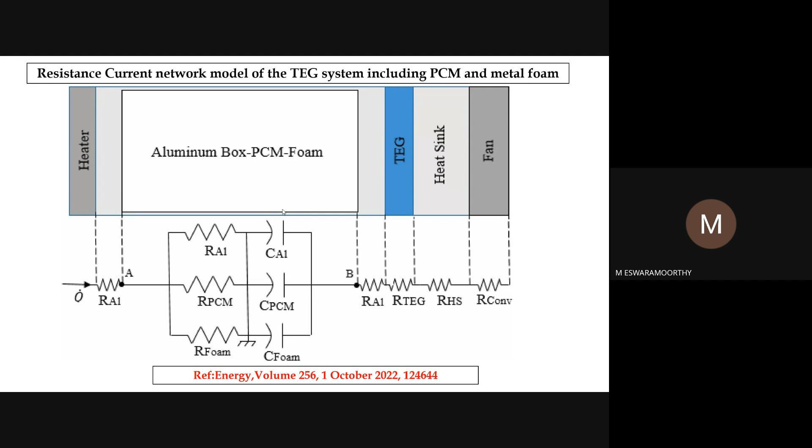There are some pictures, but no need to discuss them now, so let me skip it here. Again, the thermoelectric generator: I also worked on some thermoelectric modules. One of my next batch of students worked on this.

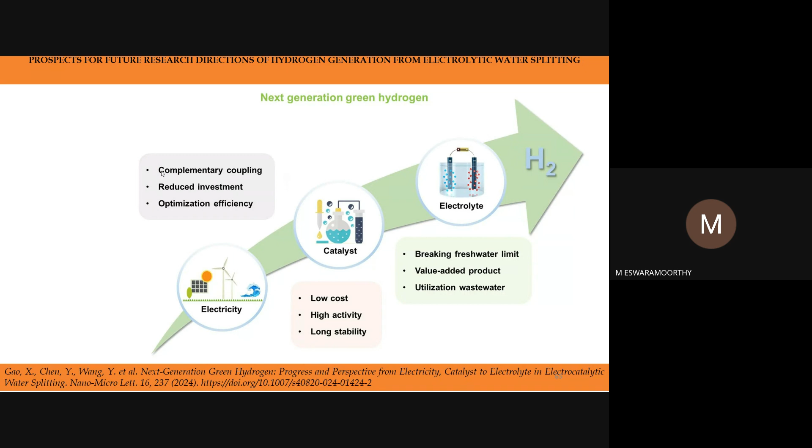So even Dr. Renan Nauni sir's talk on the levelized cost of hydrogen noted that if everybody uses electrolysis, there will be no water for human beings, animals or living organisms. It's very difficult. So breaking the freshwater limit in the electrolyte, value-added products and utilization of wastewater are where next generation green hydrogen comes into the picture, with complementary coupling, reduced investment, and optimized efficiency of electricity for green hydrogen. This area can be the next generation fuel, green hydrogen.

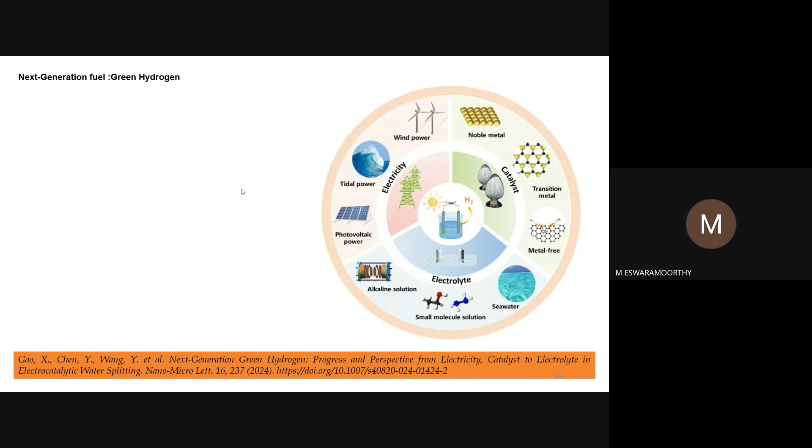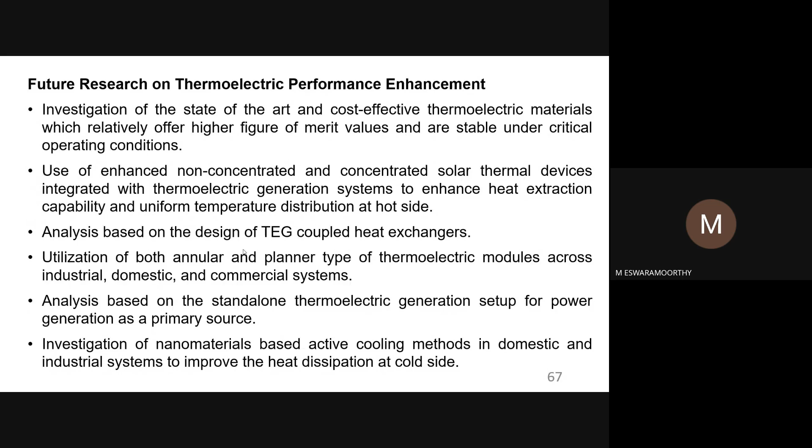So in the future research on thermoelectric performance, I didn't give some fundamental slides which were missing in this presentation. So tomorrow, let me give my presentation slides on thermoelectric components and how fabrication happens. At that time, slide 67 will be more appropriate. It was prepared yesterday, and I could not find time because of other commitments. So tomorrow let me give the complete details connected to thermoelectric performance enhancement, which helps boost green hydrogen and other things.

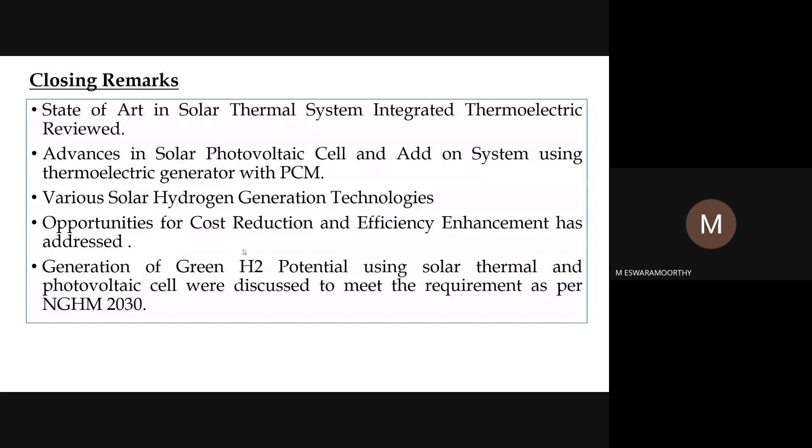So I'd like to give the closing of my session: the state of the art in solar thermal systems integrated with thermoelectrics was reviewed, and the advances in solar photovoltaic cells and add-on systems using thermoelectric generators with PCM were also discussed. Then solar hydrogen generation technologies were discussed. We always focused on cost reduction and efficiency enhancement of green hydrogen. Then green hydrogen potential using solar thermal and photovoltaic was discussed to meet the requirements of the National Green Hydrogen Mission 2030.